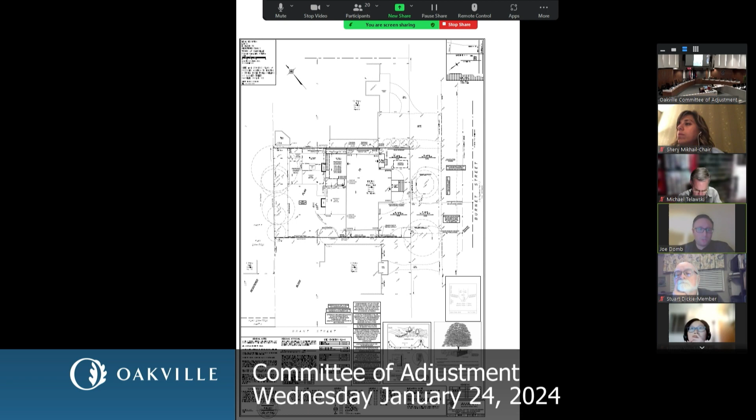I've seen that there is one letter of concern posted from a resident about 5.3 kilometers away. I also note that in that letter, there's no immediate context noted in those comments, especially pertaining to the existing massing on the street, such as at 104 Burnett. Overall, we feel the application is quite reasonable and minor in nature. I'd be happy to answer any further questions you may have.

Oh, apologies, I think you're on mute, I can't hear those comments. Did I put myself on mute? I was asking about the engineering staff's comments with respect to the grading issues that they foresee with the proposed development, if you had any comments on that.

Yes, to speak to drainage, for the building permit, the application would need to satisfy staff. Efforts would be made to ensure that the drainage is sufficient for the permit. I'd also like to highlight that the application does comply with the lot coverage and setback bylaws, as well as the proposed patios also comply.

Okay, any other questions of Mr. Domb? Go ahead, Mr. Dickie. Thank you, Madam Chair. What was the existing floor area, or what is it now before the proposal? I can get that number, excuse me.

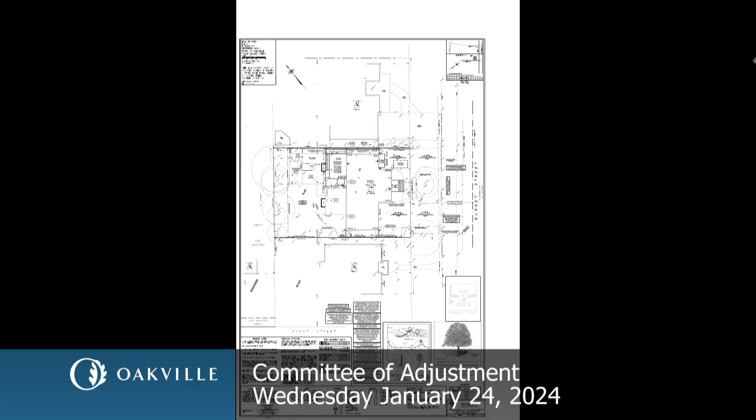Application CAV 004 of 2024 at 559 Third Line. Again, that's CAV 004 of 2024 at 559 Third Line.

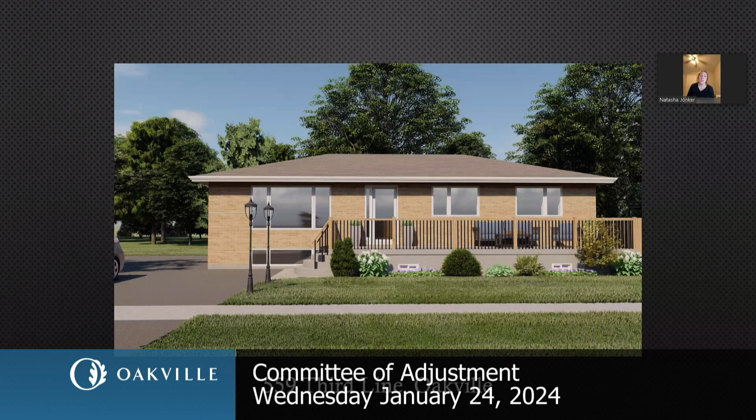Good evening, Ms. Jonker. Go ahead, you're the representing agent. My name is Natasha Jonker, I'm the agent for our clients at 559 Third Line.

Very well, thank you. Are there any questions of Ms. Jonker at this time? Any items of clarification? Okay, has anyone called with interest for this application, Madam Secretary Treasurer? There are no phone calls at this time. Okay, then we'll take the matter into committee.

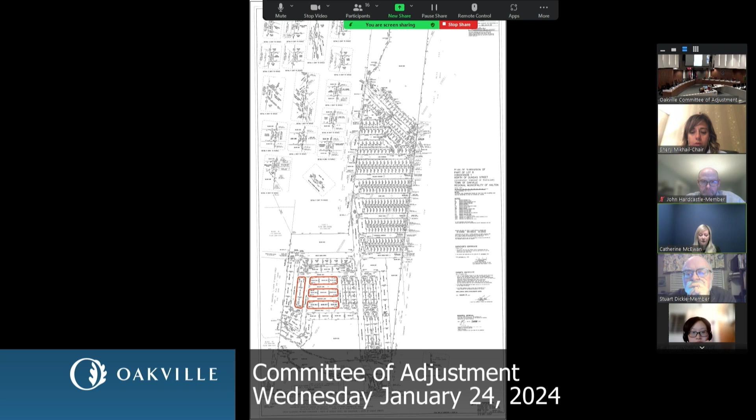We're requesting variances for 12 back-to-back or village townhome blocks within registered plan 1270. For all blocks, we're requesting that the minimum landscape requirement of 10% be calculated on a block basis rather than a per unit basis. And for the interior blocks, 238, 251, 254, and 257, we're also requesting that the minimum landscape area be calculated based on a dimension of 3 meters by 1.5 meters, whereas an area of 2.4 meters by 2.4 meters is required.

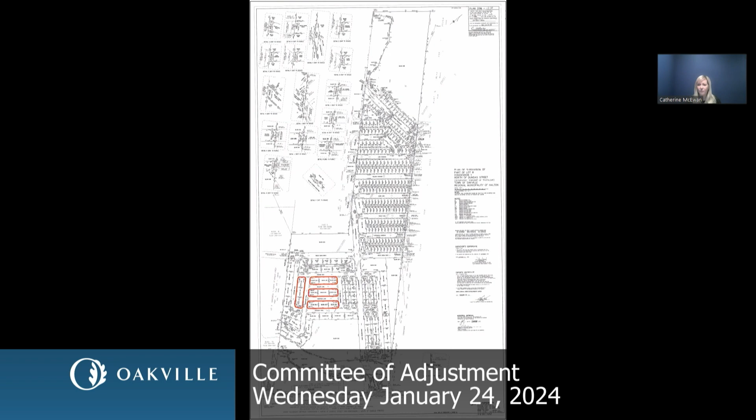Next slide, please. The next slides are all of the plans for the blocks submitted with the applications. As illustrated, the minimum landscape percentage for each block ranges from just under 12% to over 14%.

These calculations don't include smaller landscape areas on the block, such as in front of some interior units where there is landscaping, but not a large enough aggregate to count. It also doesn't include landscaping on the boulevards. If we include these areas, the total cumulative landscape percentages per block range from 17% for the interior blocks to over 25% on the corner blocks.

These percentages well exceed the 10%, and we believe they meet the intent of the bylaw. Other North Oakville back-to-back townhouses that have been built, zoned neighborhood center, have no requirement for a minimum landscape percentage, and zoning has recognized there probably shouldn't be for the GU either. In South Oakville, minimum landscape requirements are calculated on a block basis, which is the same as we're proposing.

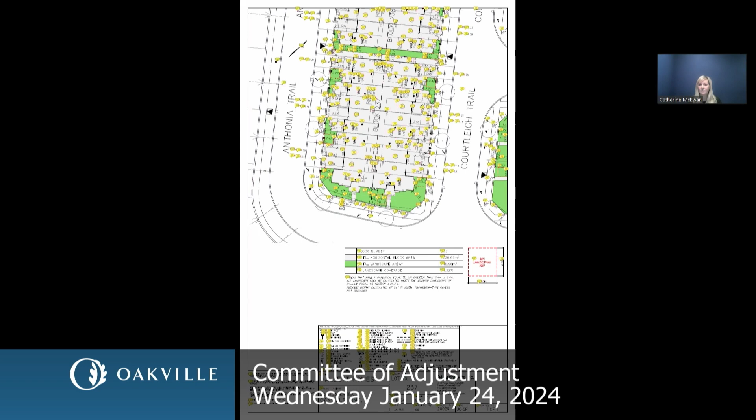Okay, thank you, Ms. McEwan. Any questions or items of clarification? Has anyone called in with respect to these applications, Madam Secretary Treasurer? There is no phone call at this time.

Okay, thank you. So whoever moves these will have to move them individually. We can start by doing that. Who would like to start moving a motion? Mr. Hardcastle, thank you, Madam Chair. I'll take the first batch here, the ones we're dealing with together, the first 4. With respect to these applications, I'll speak generally, and then put forward a motion for them individually following.

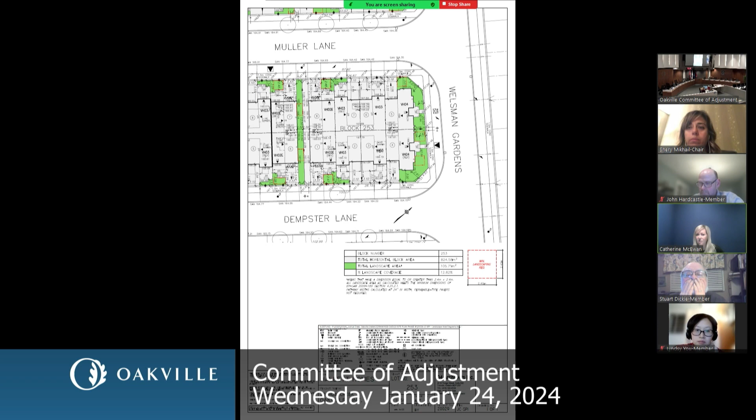Yeah, that's the one. So for this group of variances, we're just requesting that the landscape be calculated on a block basis. We're meeting the minimum aggregate requirements, which is 2.4 by 2.4, as you can see denoted in the red dash. If you go to slide 4, the previous ones, we had also requested relief to change that shape of the aggregate. If that makes sense.

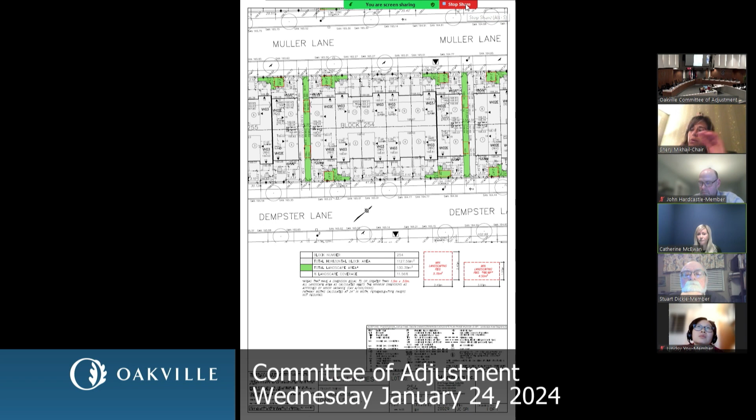Yes, it does. I just wanted to highlight what the difference is. If anyone has any questions, just let me know. Okay, thank you. If we can just pull out of the Zoom. Yeah, thanks. Okay, any questions?

Who's ready to take the baton from Mr. Hardcastle and move this group? Give it a go, Miss You.

Thank you. So we'll start with the CAV 006 of 2024 at Dempster Lane. Having undertaken my site visit and having reviewed the application materials together with the staff reports, having heard the presentation done by the agent, in my opinion, this variance meets the 4 tests under the Planning Act. As such, I'd like to move a motion forward to approve this variance, subject to 1 condition: the approval expires 2 years from the date of the decision if a building permit has not been issued for the proposed construction. Is there discussion on this recommendation? I see none. All those in support? The application has been approved, none opposed.

CAV 007, Block 256 at Dempster Lane. Thank you. As I mentioned earlier, the same rationale, and I'd like to move a motion to approve the variance for this block, subject to 1 condition, that the approval expires 2 years from the date of the decision if a building permit has not been issued for this proposed construction. Is there discussion on this recommendation? I see none. All those in favor? Okay, the application has been approved, none opposed.

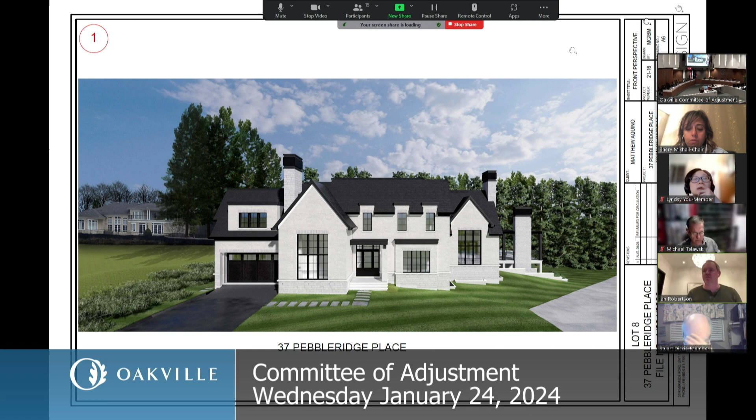Good. So my name is Ian Robertson, and my address is 20 Rivermead Road, Concord, Ontario, and I'm the agent acting on behalf of the owners for 37 Pebbleridge Place.

We are here today for 3 minor variances for our project. The first being garage area, second being RFA, and the third being building height.

Before I get right into my presentation, if we could skip to page 2, just as a note, I'd like to mention that we do have 4 letters of support, 2 on Shorewood Place, and then 2 on Pebbleridge. We also previously had a letter of objection on Shorewood directly behind us in previous applications before the committee, and we had subsequently had a conversation with them and resolved any concerns that they had at the time.

I do understand there's one more letter of objection, but it's my understanding there's several streets northwest of us, and I think they're probably outside of the circulation area, and I'm not sure how their objection is impacted by our proposal. So our proposal is for these three items I mentioned. If we could skip to page 4.

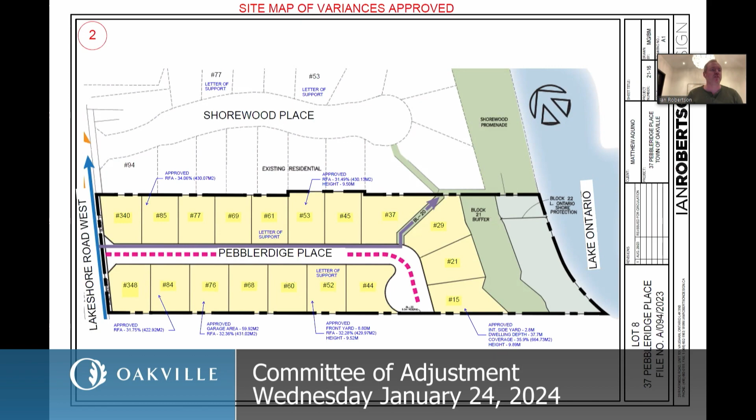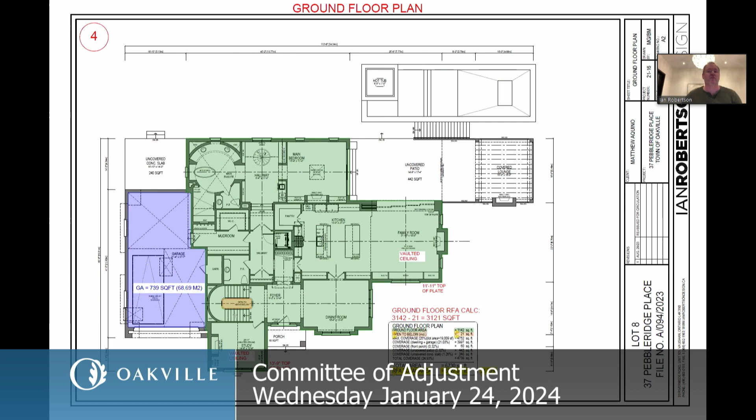Our second variance will be for RFA. We're currently looking for a 2.7% increase to 31.7% from the 29 that's permitted. And this application, this variance, if we could skip to page 4 or 5. The RFA is an interesting beast.

The planning department had concerns with the size of RFA in relationship to building height and connected the two of them. I would suggest that there isn't a connection to the two of them, and I'm going to let you know why. If we look at this floor plan of our second floor, bedroom 5 is in the top right-hand corner, and if I were to remove bedroom 5's closet, washroom in itself, effectively removing our 2.7% RFA or 514 square feet, the exterior front facade of the dwelling would still look the same as what it currently looks like, but we now comply with RFA.

So to connect RFA and building height as the planner had done, I don't think there's a relevance there. A secondary note to that is if I actually remove bedroom 5, the washroom, and the closet, reducing my second floor area and my RFA, a different portion of the bylaw kicks in where it says that we now have less than 25% of the area above the garage, and therefore the garage area itself would have to be calculated in RFA, therefore pushing us up another 68.69 square meters, or about 4% in RFA. Those calculations, as you can effectively see, would never actually change the massing, shape, or size of this building, but the technicality in nature. And so it's our belief that the 2.7% increase has no bearing on building height or building mass, as I illustrated in this image here.

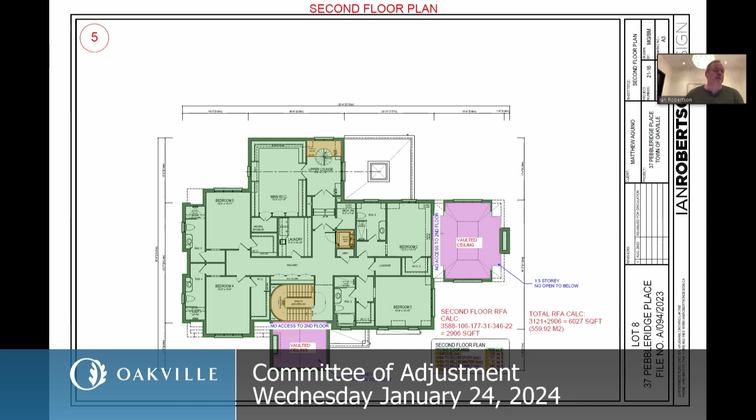I'd also like, if we could flip to pages, to toggle through these for building height. If we go to page 8 to start with, the committee has approved several homes in the area now since this street was developed. And if we go through 8, 9, 10, 11, and 12, the committee can see how our dwelling has minimal impact in comparison to all the adjacent and approved dwellings in the area.

I would suggest that our sloped pitched roof, which effectively illustrates 1.5 story in all the elevations adjacent to properties, brings down the scale of our design where it pertains to the neighbors who are northwest, northeast, and the pathway to the southeast, west.

Looking at this, I would suggest that our RFA doesn't have any bearing on the building height, and the building height has no bearing on the RFA. They each have their own merits as to why they are suitable for this area.

Flipping through these approved elevations of other projects, you can see ours fits in with the scale and streetscape of itself. And I think that's where I'll end my presentation right now, but I am happy to answer any questions the committee itself might have.

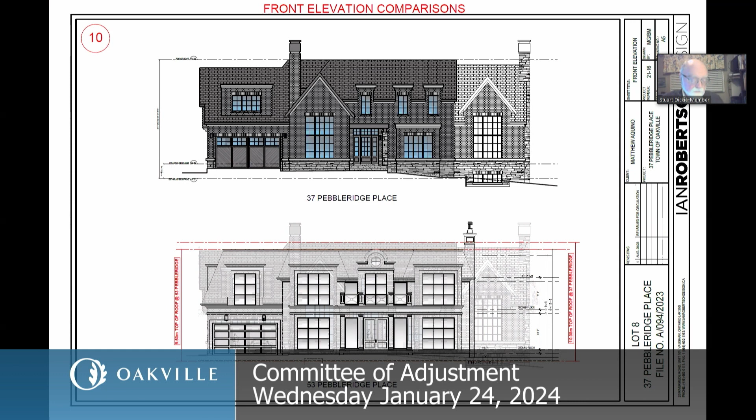So on the lower image, just flip through them slower. Pardon me? They just flip through them slower, don't whip through them. Oh, it's not his control, it's town staff. So if you want town staff to give you a moment, just ask them. Sorry. Okay, Mr. Dickie, when you're ready for the next one to flip, you can ask.

Oh, okay, yeah, please flip to page 11, I guess it is. Okay, at page 12, I think we saw before. That was. Oh no, it wasn't. Okay, thank you.

As far as those sketches, what I see, and I could be wrong, again to the consultant, your roof height seems to be 8.75 feet. Is there a reason why you have to have that roof height so high? We often see roofs at 5 feet and 6 feet. There's something in the design that requires that.

Our roof differs from the majority of the houses that have been approved on the street, in that a lot of the other ones have significantly large flat roofs and significantly steeper roof pitches, creating more of a square massing. Whereas ours has a traditional pitch. It still has a flat portion in the center, but the pitch roof is significantly lower than the remaining houses, or the majority of the houses in the area.

The style of house is what suggests what type of roof would be on there. Some of the other ones are mansard style, with French inflections or whatnot, and ours is a farmhouse of sorts, so it would have a more traditional roof on it.

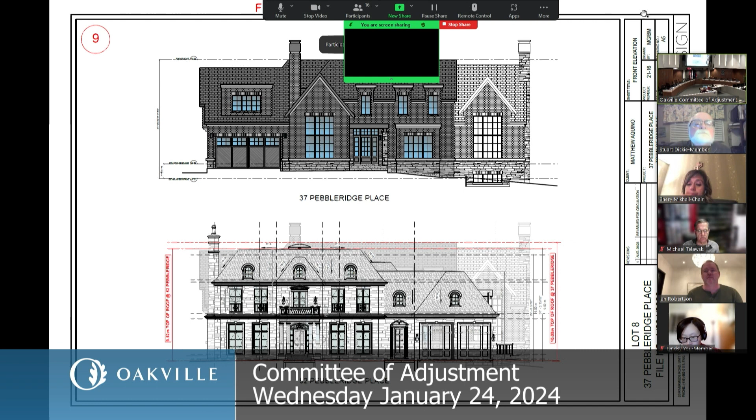Perfect, thank you. As you can see, the area in yellow is our main dwelling, the central hub of our building, at 10.08 meters, and the light purple are all the areas that are dropped below this line, all pitched roofs except for the central section there where it's indicated as flat.

Just to give you an idea, it's almost about a 50-50 split between the yellow and the purple roof pitches. On the left-hand side, there's 9.39 to the peak of that one. On the far right side, it's at 9.65 meters. To the rear of the property, it's 5.54. And at the front, where the 1.5 story gable is, it's actually at the 9 meters peak there. So those elements are what I was speaking to as far as reducing the overall massing adjacent to neighbors to the rear, to the left, and then the parkette to the south or to the right.

One other question, hopefully only one. In those examples we were looking at before, I forgot to ask, do they have height variances? Are they under the 9 meters or under, the other ones on the street? Several of them, if you could flip to page 2, I believe.

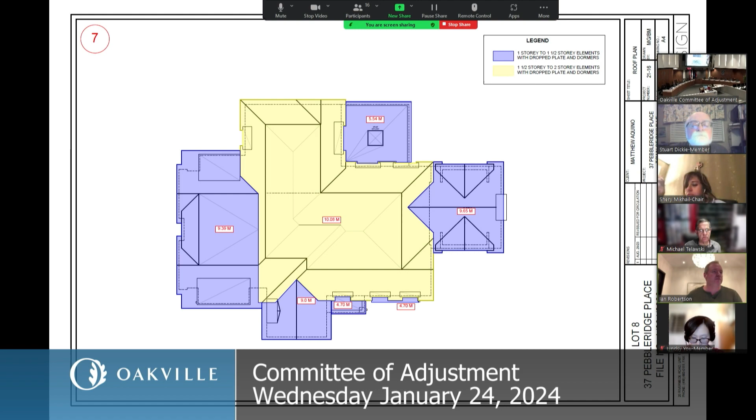Yeah, page 2. This is an indication of variances that were approved in the area. So 53 Pebbleridge was 2 doors beside us at 9.5. Across the street from us was approved at 9.52. Lot 15 was approved at 9.89 in building height.

All of them are below what you're... substantial. Well, 9.89 is a mere 8 inches, which is nominal. I think in an overall grand scheme of things, when you're looking at it in perspective. And number 53 and 52 at 9.5 meters are higher than our point of contact that is adjacent to those properties, where I had 9.39, I believe, on that side.

So is it because of the street grading, Mr. Robertson? Actually, our house was pushed out of the ground from the time we started to design this project several years ago to the time we got to our July hearing last year. As-built drawings for sewer systems were provided, and they actually raised our house by 0.3 or 0.4 of a meter to begin with. That impacted our height, and we had to reduce it.

Okay, sorry that I interrupted, but I can't see anyone because we're still on that sheet, so I had to speak up. Go ahead, Mr. Dickie.

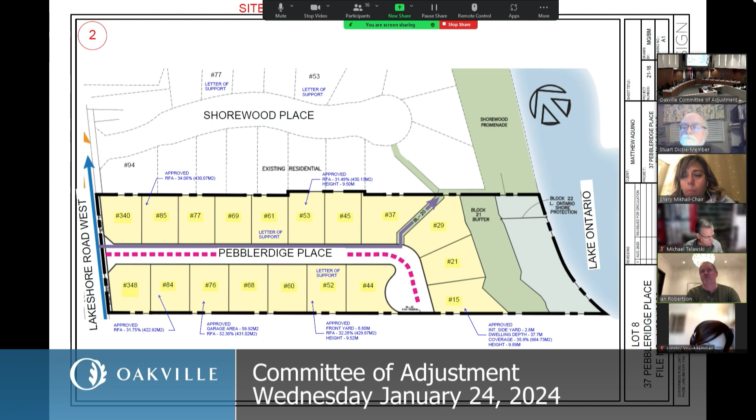one of the comments from the town planner at our February 2023 meeting was in support of our 10.03 meters. His conclusion at the time, as I recall though not word for word, was the appearance of our dwelling from the property line would be approximately 9.08 meters as it would appear. I know the town of Oakville has commented on that, the appearance of the dwelling versus the actual dwelling compared to the established grade. They were in support of that 10.03 meters at the time, and we're only 0.08 off from that point now.

I'm sorry, but you didn't get approval for that in February, did you? We did not get approval for that, but that was one they had put forth as they had no objections to. They were willing to approve that height. They had no objections at that time. Thank you. Thank you.

Any further questions or items of clarification? Go ahead, Mr. Hardcastle. Thank you, Madam Chair. I see that you've played around with your roof form a little bit and your roof heights a little bit, but

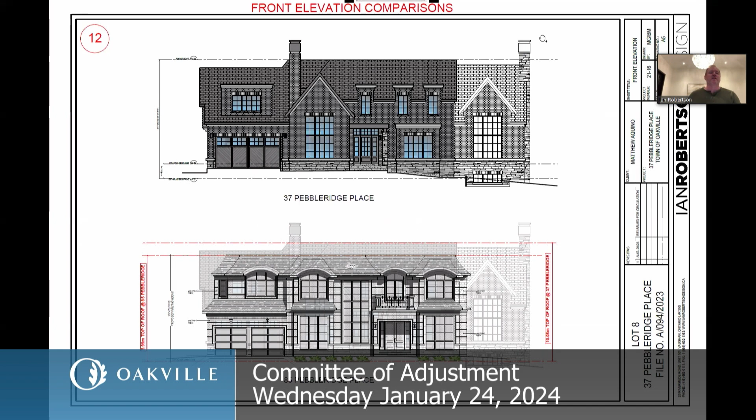And if we actually flip to page 13 in my presentation, there's an excerpt there that illustrates several images in the bottom right-hand corner with projecting and protruding elements, 2 stories, 1.5 turrets, as well as dormer details over top the garage being recessed. And I would say that our house and our elements mimic these, several of these in different contexts.

And if you flip on the same page, if you actually note the highlighted areas on the left-hand side, things such as dividing larger buildings into smaller elements. If you look at my design, we have a garage element, we have a central element, we have a third right-hand element where that family room is. And those are done with articulation in the building facade, which is part of their guidelines and requirements, to break up the overall massing.

And they want varying heights, architectural components that reflect human scale, horizontal detailing to de-emphasize the mass. We have a horizontal banding of stone that, even though we are long, we actually have 3 components of this dwelling.

If we continue to go through these things, I think we meet a lot of the requirements of these guidelines, which is why we have architectural control approval in this dwelling.

Thank you. Mr. Telawski, you had some questions as well.

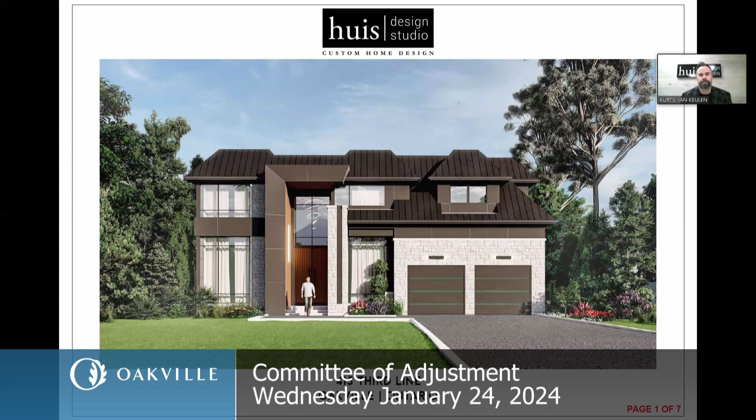I'm not sure who... Mr. Van Keulen? Okay, go ahead, Mr. Van Keulen. Good evening, Madam Chair, members of the committee. My name is Kurtis Van Keulen, Huis Design Studio. I'm representing the owners of 415 Third Line this evening.

We're back in front of you with a slightly reduced proposal. We're seeking two minor variances, one for the RFA and one for the front yard setback. The purpose of my presentation today is more to highlight the changes we've made in an effort to reduce the overall massing and the impact of the two-story dwelling on the existing single-story dwellings. So if staff could flip quickly, I'll walk through a couple of the items.

If staff could flip quickly to the next page, and the next page. So you see here, we've reduced the second floor size a little bit and pulled in the second floor slightly, adding some opportunity to add some roof slopes. Those roof slopes, mainly over top of where the garage is viewed from this elevation, will buffer the massing in relation to the single story dwellings on either side. Furthermore, the reduced roof elevation of the family room does add quite a bit of a depression in the overall scale of the two-story dwelling, which further decreases the massing.

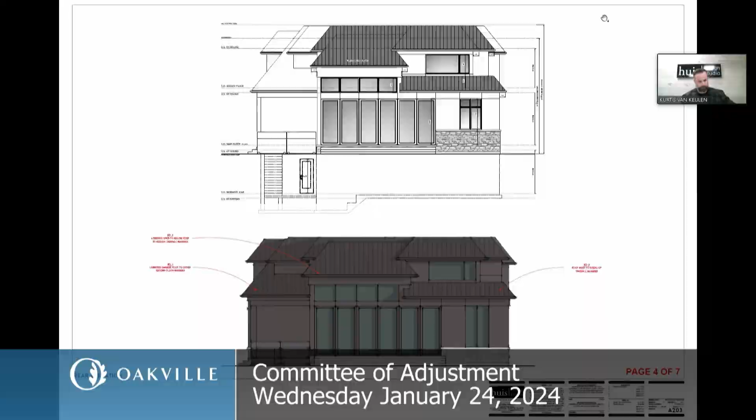Okay, thank you. Any questions of Mr. Van Keulen or items of clarification at this time? Okay, I see none. Who would like to move a motion?

Go ahead, Mr. Dickie. Thank you, Madam Chair. Based upon my review of the owner's application, site plan, the building elevation, my site visit, together with the presentation by the owner's consultant and the planning staff's report, I am satisfied that the variance is minor in nature and conforms to the 4 tests of the Planning Act.

I'd also like to acknowledge the 9 letters of support from various property owners on the third line, and we are aware of the letter of opposition from the owner at 332 Sunset. We're aware that it's further afield, but we also, as the members are aware, are mindful of persons concerned in another previous matter before the committee.

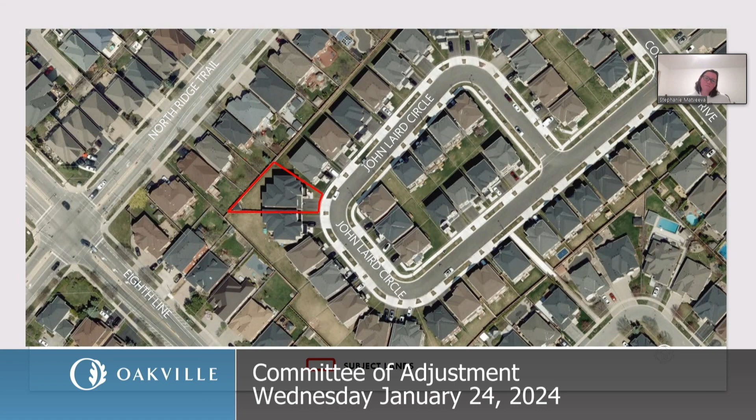The rear yard deck is being requested to facilitate a natural and logical extension of the living spaces, and to better facilitate and accommodate the family's changing needs. This rear yard deck proposal triggers the need for one variance to permit an increased encroachment into the required rear yard setback. The variance is phrased in a way that it's to permit an uncovered platform - it is to permit the rear yard deck. If I could have the next slide, please.

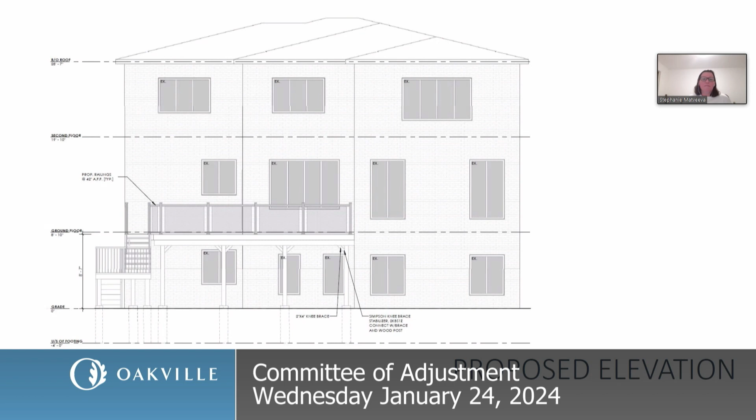Part of the conversations with planning staff and the property owner, the proposed rear yard deck is to be shielded from public view. It's well positioned on the lot, of an appropriate size for the lot as well as for the family. There's privacy fencing along the shared property lines. Adverse privacy and overlook concerns will be addressed and mitigated through the provision of this privacy fencing, plantings along the shared property line, as well as landscape areas in the rear yard for the rear yard amenity area.

So in closing, as outlined in our submission letter, it's my opinion that this proposed variance is largely technical in nature. It's to reflect existing site conditions, the unique site topography, and the change of grade between the front and rear property lines. In my opinion, it meets the four tests under the Planning Act. I'm happy to answer any questions.

Thank you, Ms. Matveeva. Are there any questions or items of clarification of Ms. Matveeva?

Go ahead, Mr. Dickie. To the consultant: you said there was no overlook or privacy concerns, but in that view from the existing deck, I would question that. I wonder if we could see that again, Madam Treasurer - the view from the deck looking out towards the rear fence. And for the consultant, you indicated there's trees etc. that will mitigate against that overlook. I didn't notice that in the picture either, so if you could explain or expand on that, I'd appreciate it.

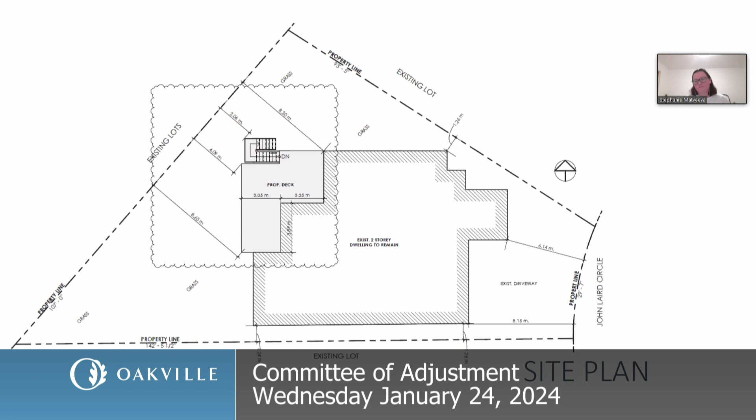Mr. Dickie, go ahead. Thank you, Chair. To the consultant - why couldn't you move the stairs to the south and take it down the south part of the deck where you have a much bigger, deeper rear yard?

Through you, Madam Chair, that was part of the conversation - it's almost like a game of Tetris of how best to accommodate everything. There was a desire on the owner's part to make sure the deck and its overall area is functional, for example, to be able to accommodate a compact but fairly standard table and chairs - a certain area is required. The other consideration is if the stairs were moved, it would actually make the variance worse. So again, we had a bit of a Tetris game of where is the best position for the stairs in relation to the deck.

I would highlight again that versus the initial application provided last year to the committee, the overall size of the deck has actually been shrunk. So there is effort made to figure out how best to accommodate everything - including the owner's livability of this deck - while making sure we comply to the extent we can with the zoning bylaw, making it a functional and livable area. I hear the concern. This is not to say this is necessarily the best design, but it's the design we came up with to best accommodate everybody's desires and needs.

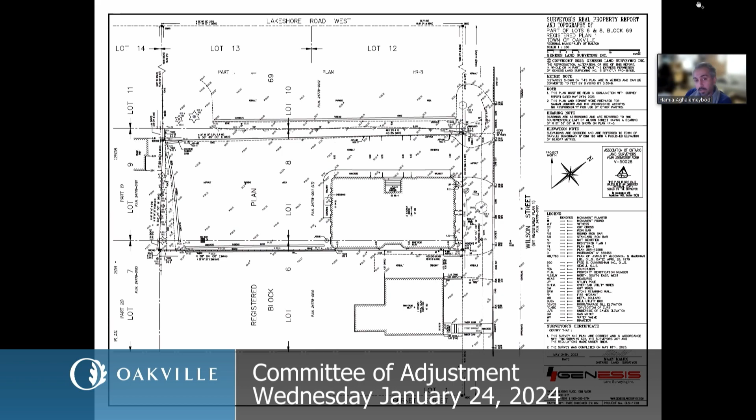Okay, thank you, Mr. Aghaeimeybodi. Who would like to ask any questions or items of clarification? Okay, has anyone called? Oh, Mr. Dickie, go ahead. Sorry, seems to be my night tonight for questions.

I'm sorry, to the consultant, I thought you said that there's been no reduction in the number of parking spaces, but from what I saw, I thought you had 14 spaces before and now you have only 9. Is that correct, or did I read something wrong?

Sorry, can you say it again? You got cut off in the process. I couldn't hear from the last part. I thought, from what I saw, or interpreted, you had 14 parking spaces, and now you have 9 parking spaces. You seem to indicate there's no change to the parking space.

Oh, no, that's what I said was we had those, we could provide those, but in order to do that, to have that number of parking, we had to injure the trees in the back of the site, right? And in order to keep that, in a meeting we had with forestry, transportation, and planners, we figured it's better not to do that and instead go with a variance and get a variance for that. So we keep the trees, we do not touch the back of the site.